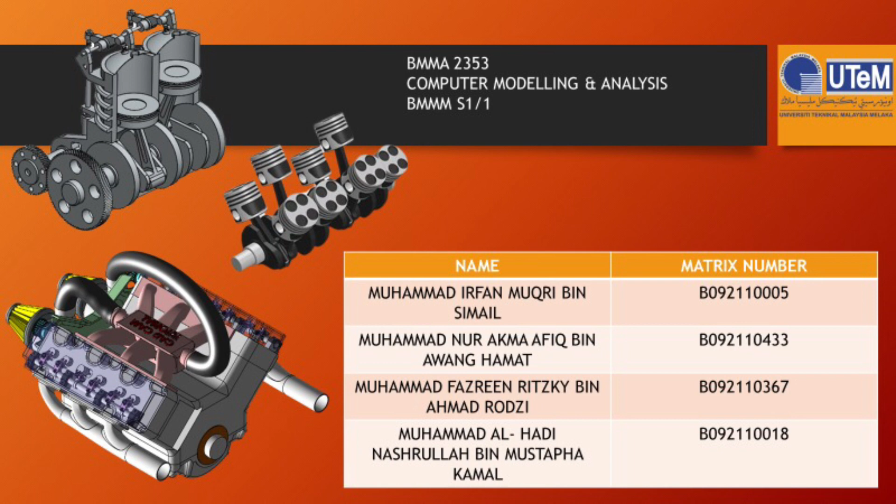This is our profile for this company. Company name: Manufacture Digital Tech. Mission for this company is to empower innovators with engine design and make technology so they can achieve new possibilities. Vision for our company is to be the best solution for all problems in the manufacture and formation of engines. So the project title is two-cylinder engine.

Objective of this project is to produce a two-cylinder engine construction according to the part by using manufacturing software such as SolidWorks and ensure the project produced is accurate.

The problem statement that we face: need to study the failure of piston to prevent any harm or injury to human. Failure of piston engine may cause damage to automobile as well as an accident. For this project, the scope focuses on technical drawing part, 3D modeling, assembly part, and material selection and analysis.

This is our organization chart. First, project manager, which is Muhammad Nur Akmal. Second, design engineer, which is Muhammad Irfan Muqri. And me, production department, Muhammad Al-Hadi Nashrullah. And lastly, analysis engineer, which is Muhammad Fazreen Ritzky.

For team member job scope, Akmal will plan and designate project resources, monitor progress, and keep stakeholders informed the entire way. Irfan is responsible for the research and design, technical design, and software design of the company's new products.

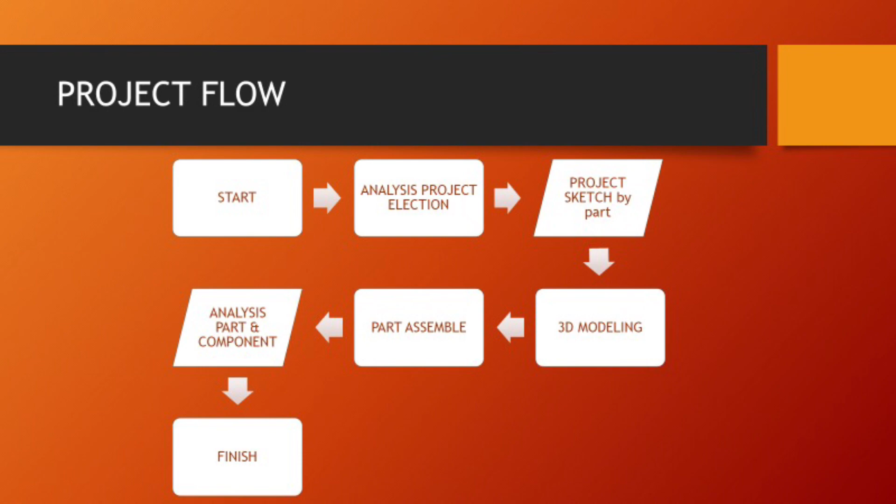Drawing part is the first step: to draw the design of each part by placing dimensions that have been measured previously. Drawing part also needs to be done first because the measurement applied will determine the suitability when assembling the part and also the analysis part.

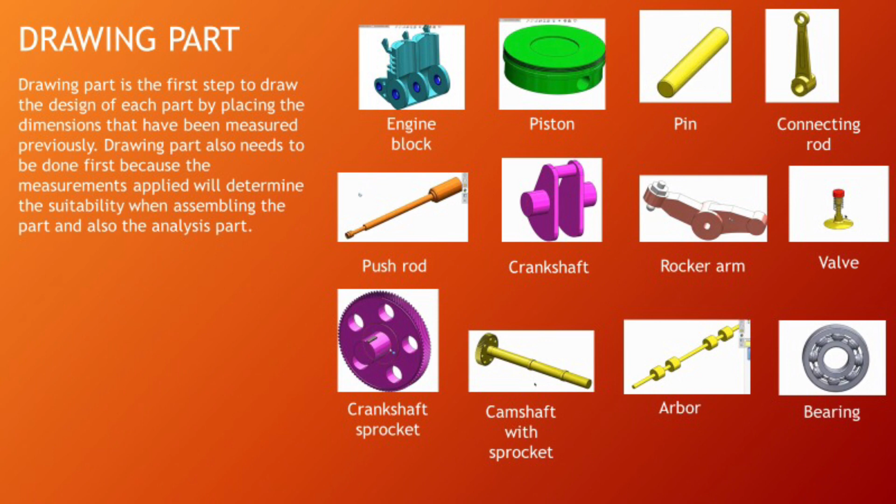So this is our parts: engine block, piston, pin, connecting rod, push rod, crankshaft, rocker arm, valve, crankshaft sprocket, camshaft with sprocket, arbor, and bearing.

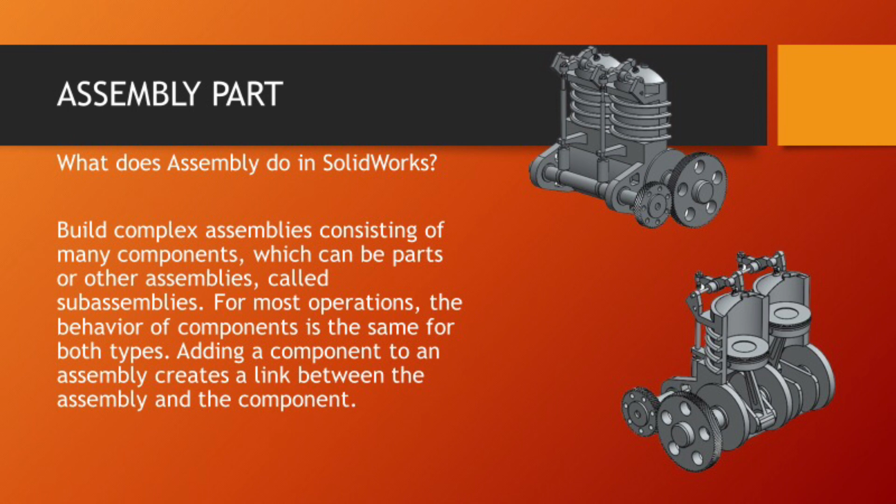Next, assembly part. What does assembly do in SolidWorks? Assembly in SolidWorks is used to build complex assemblies consisting of many components, which can be parts or other assemblies called sub-assemblies. For most operations, the behavior of components is the same for both types. Adding a component to an assembly creates a link between the assembly and the component.

This is the video so we can see the piston move up and down. This is the exploded view; we explode each part one by one. So this is a simple video showing us exploding each part one by one.

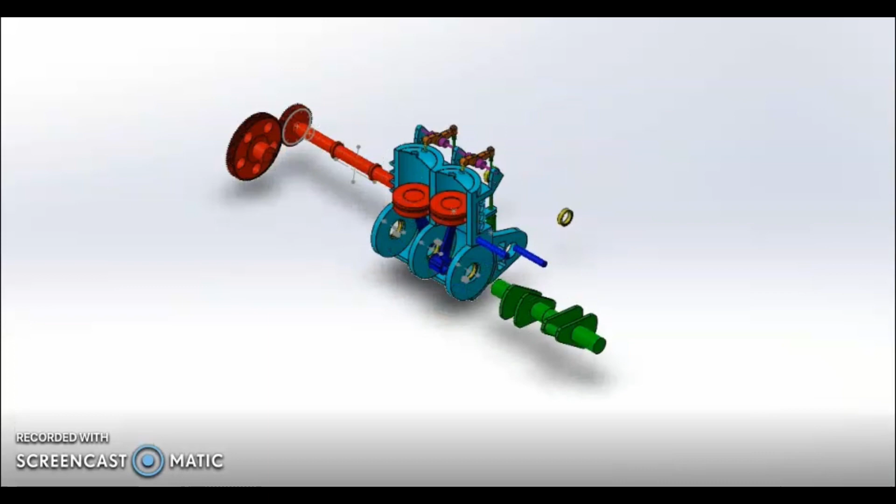This is the product isometric view. Why is isometric design important? Isometric map designs are more realistic than flat ones. They give the user a better visualization because of the angular axis, because it looks 3D, and an isometric map is better if you want to emphasize all kinds of shapes as well as major parts. Overall, using an isometric map can convey direction better.

So this is our product in isometric view, which is top view, front view, side view, and 3D view.

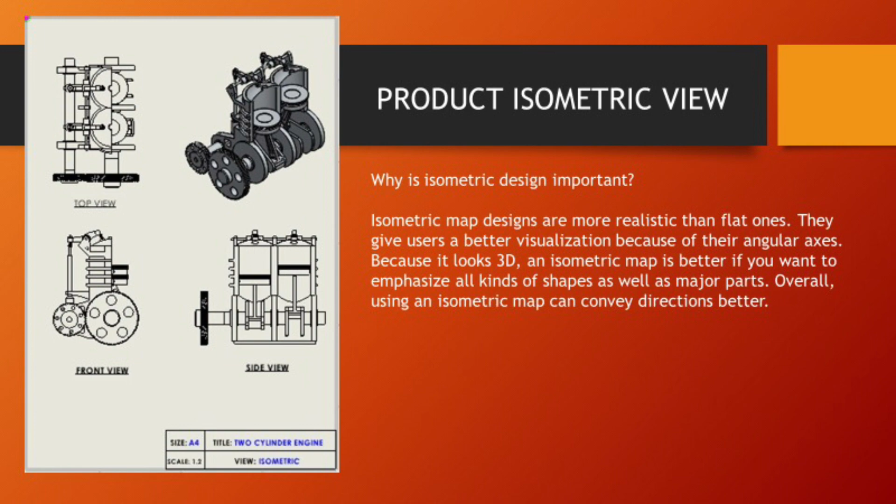Material selection. Why is material selection important? Material selection ensures the integrity of the design. In the selection process, material will be assessed for tensile strength and modulus, flexural strength and modulus, impact strength, compressive strength, fatigue, endurance, creep, and stress relaxation properties depending on the product.

So based on this table, the material of the piston is alloy steel, the bearing is metal, and the others are 1060 alloy.

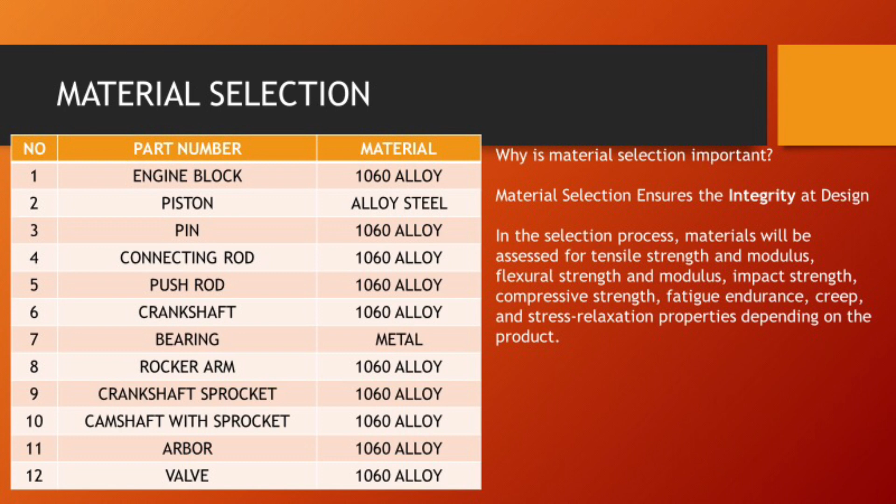Analysis of product: Simulation is an easy-to-use portfolio of structural analysis tools that use finite element analysis (FEA) to predict the product's real-world physical behavior by virtual testing of CAD models. In the analysis section, we find von Mises stress, displacement, and deformation.

Von Mises stress is a value used to determine if a given material will yield or fracture. It is mostly used for ductile materials such as metal. The von Mises yield criterion states that if the von Mises stress of a material under load is equal to or greater than the yield limit of the same material under simple tension, that material will yield.

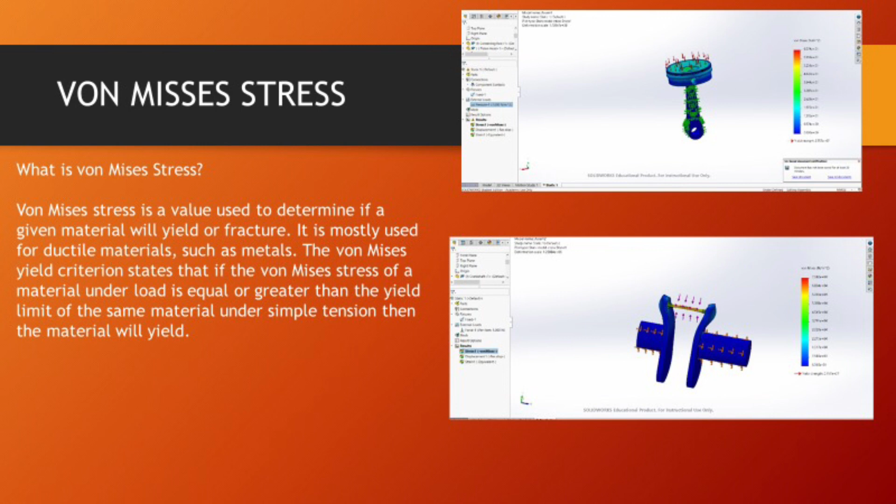So this is two pictures of this product; we choose piston and rocker arm.

Displacement analysis: In a situation where the forces may not be known, an expected displacement can effectively be used as the load input to the analysis.

This is known as a prescribed displacement and is available under the external loads drop down.

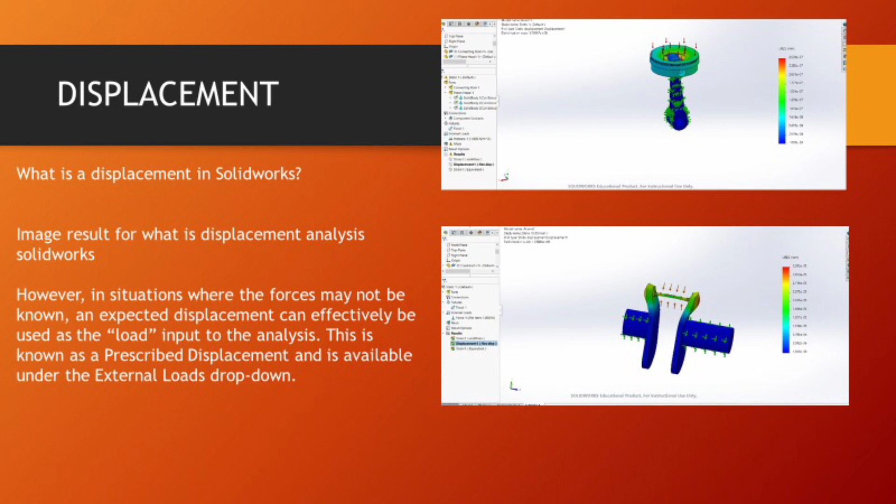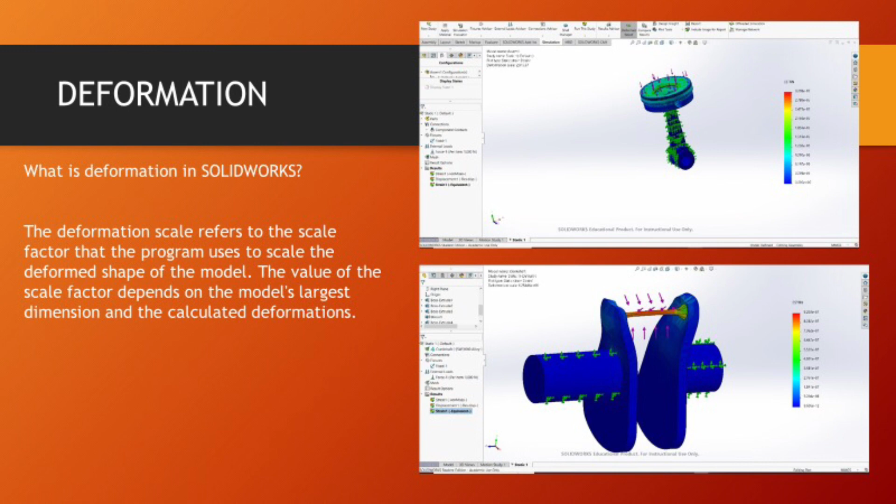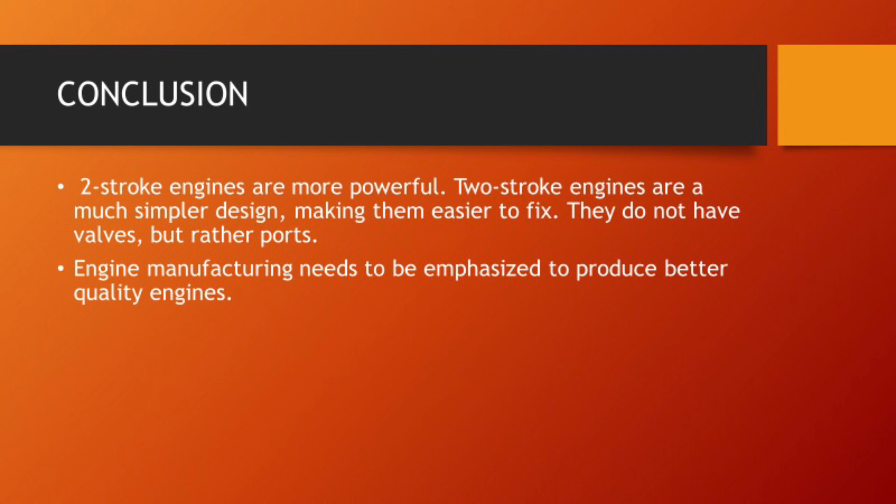The conclusion of our project is that two-stroke engines are more powerful. Two-stroke engines are a much simpler design, making them easier to fix. They do not have valves but rather ports. Second, engine manufacturing needs to be emphasized to produce better quality engines.